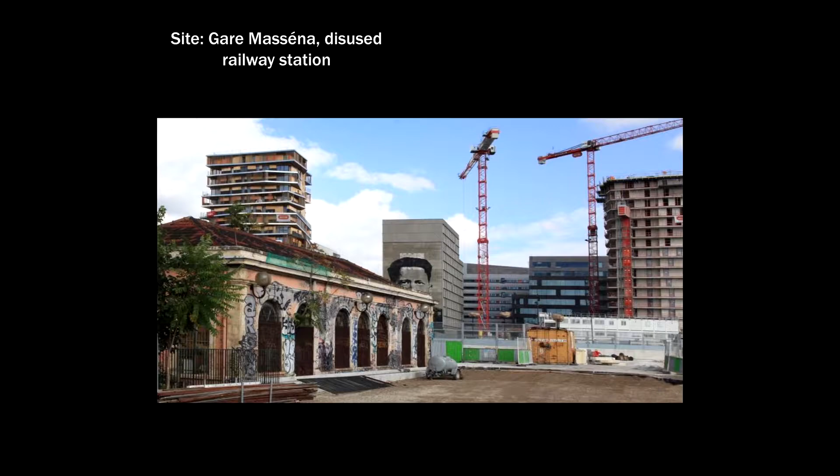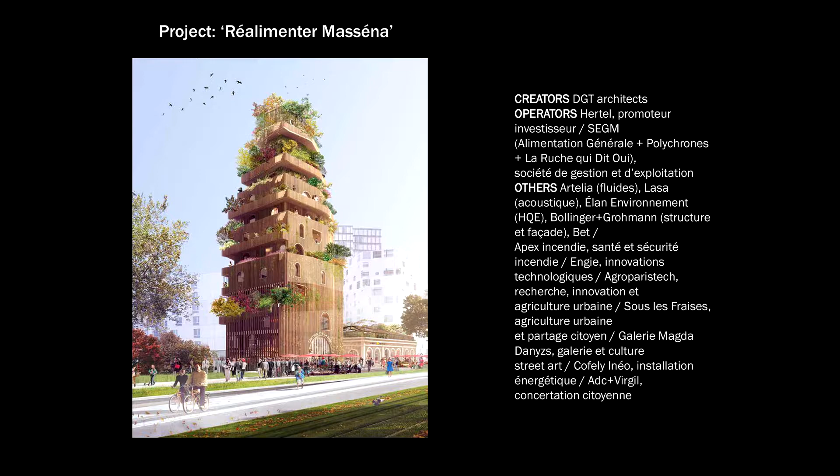And the winning project has been a project called Réalimenter Masséna, re-feeding Masséna. The architect is a young Lebanese architect, Lina Ghotmeh, and the developer is Hertel. The project is all about the entire food circuit, from production to consumption in the same building. The motto in French is de la fourche à la fourchette.

We had in this project laboratories of research, an institute about food, a market, restaurants, urban agriculture, apartments for chefs, spaces for food lessons. The building will be entirely made in wood, either the structure or the facade, and it will bring a lot of animation in a newly urbanized area that lacks shops and life. Another example, maybe the most, this is another view of Réalimenter Masséna.

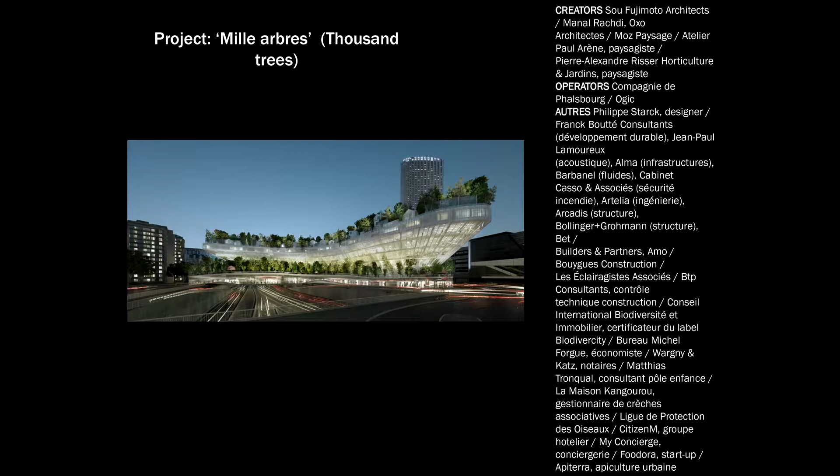The winning project is this one, 1,000 Trees, a concept by a Japanese and a French architect. The Japanese architect is very well known, Sou Fujimoto, and the French one is a young architect. The company is named Oxo, and the developer is Compagnie de Phalsbourg. A very diverse team, as you can see on the right side of the slide, including the designer Philippe Starck.

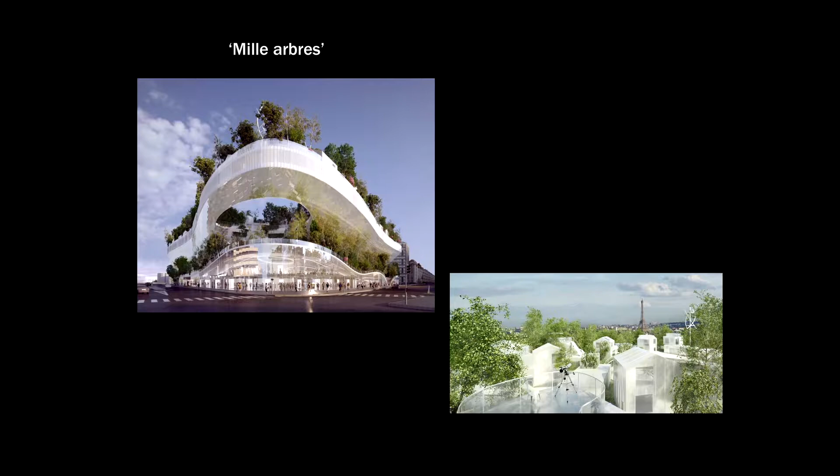What is interesting is that this project has two forests, which is why it's named 1,000 Trees: one public forest at the bottom of the building, and a private one with a village on top. You can see the little village here on the top of the building, along with hotels, shops, and childcare centers. It's a very ambitious project, a technical challenge, paving the way to new types of buildings over the ring road and the possibility of inhabiting there.

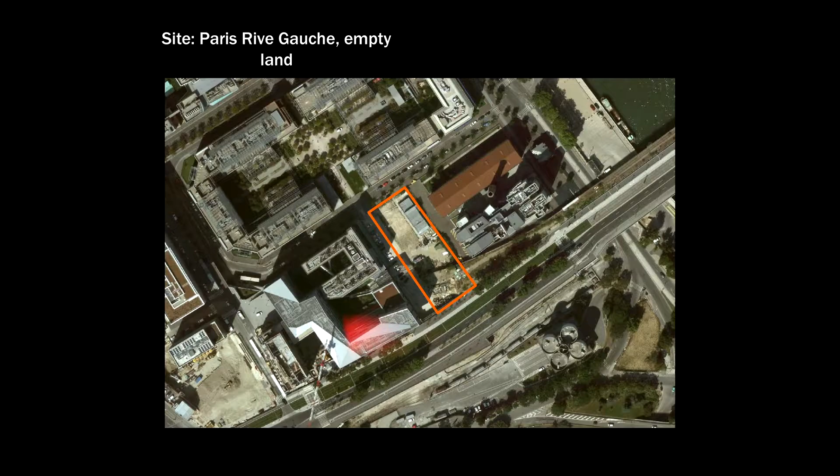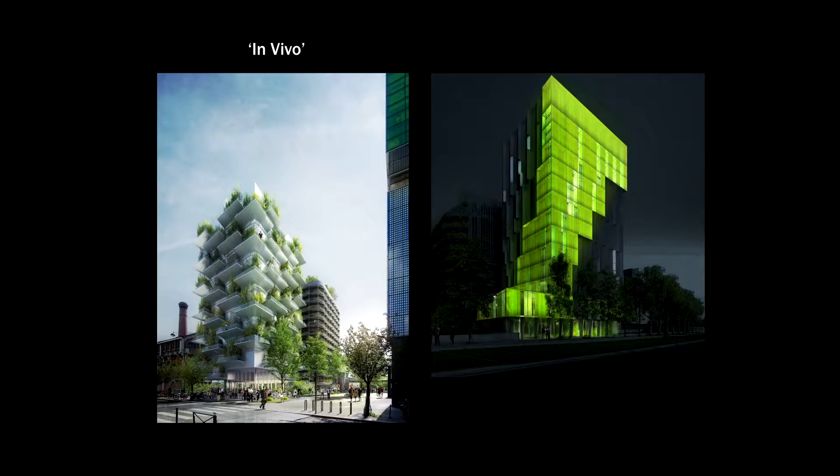The program had to be mainly housing, and the winning project is In Vivo, a technological innovation for living buildings. The architect is X-TU, and the developer is Marignan. There are three buildings: one called Plant House, another Tree House, and the third, more interesting, Algae Building. The facade of the Algae Building is made of microalgae that helps cool the building and can be cultivated for cosmetic and other industrial uses. The architectural firm X-TU has worked for many years on this algae technology and holds a patent on it. As you can see, the algae are luminescent during the night.

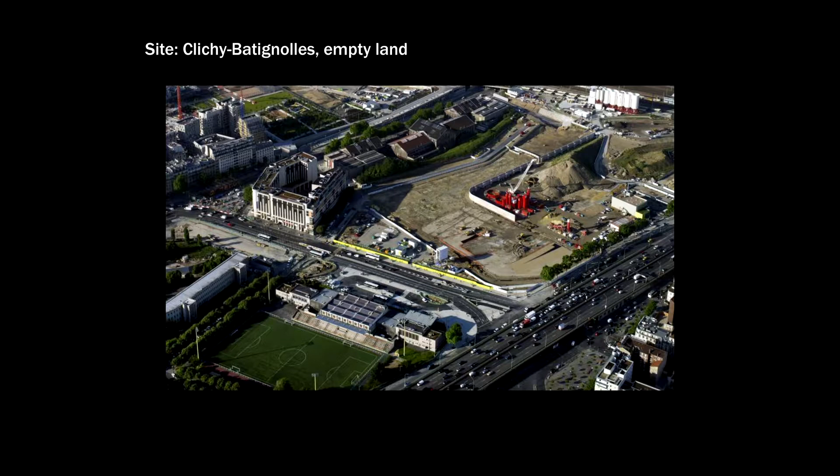My last example is the Stream Building, on empty land in Clichy-Batignolles, a railway wasteland. Here the program could not be housing given its location. The winning project is a mixed program of offices and hotels, Stream Building by Philippe Chiambaretta and Hines. This project is the outcome of long-term theoretical work led by Philippe Chiambaretta through his scientific review, Stream, on ecological buildings and new modes of working.

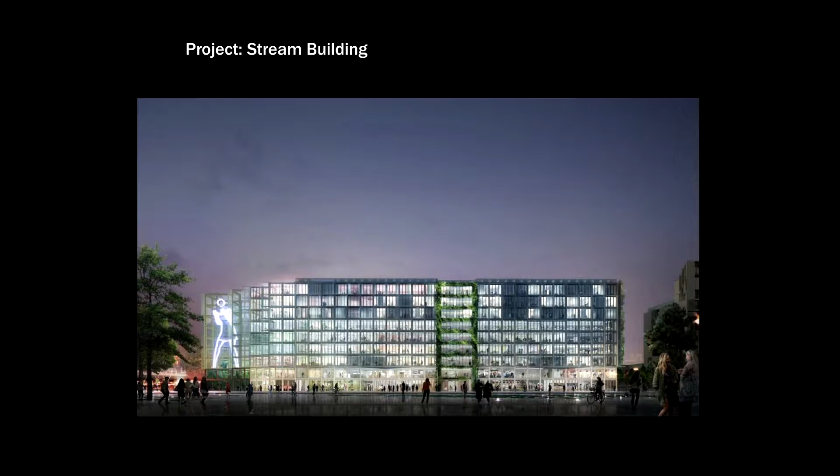This is a very new generation of office buildings, mutable in design, allowing it to transform into a housing building, open 24 hours a day, a hotel for young workers, with all the spaces designed as co-working spaces. This building also has a wooden structure and agricultural activity on the top. So you can see another side of this building.

Some overall figures of this competition: first, the high number of social housing units we were able to create, and a high amount of green areas—one of the major trends of the competition. The newspaper Le Monde titled its piece '22 Shades of Green.' At the same time, these projects distinguish themselves by the commons they create, generating important revenue for the city of Paris. But we met our commitment to base this competition on innovation, not on money.

When things are well organized, private projects can be of very high general interest when the competition is created with this goal in mind.

Other overall trends of this competition: the first one is that the buildings of Reinventing Paris have been thought with the final users. It's what we can call a user-oriented architecture. It's impossible today, I think, to think a building without the final users, and they have to be part of the team, not only people we ask questions in order to see what they want.

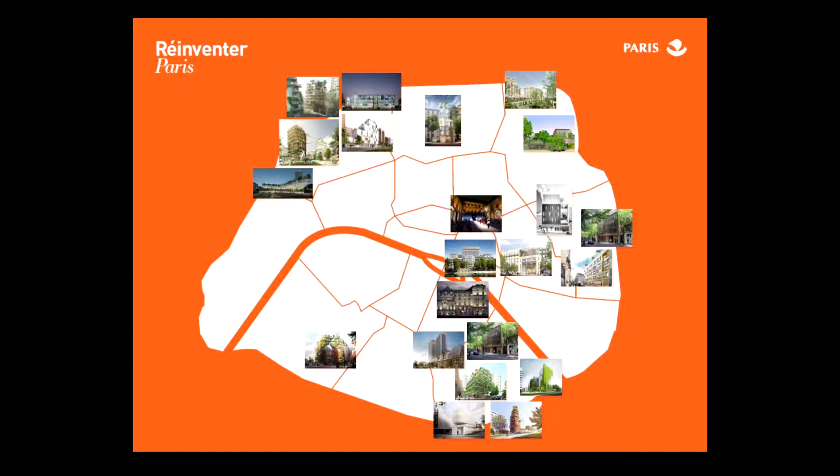We had 22 laureates. The 22 laureates give an overview of the current state of the art in urban innovation. They innovate in environmental issues, in mixing uses, in materials, in processes, and in multidisciplinary teams. 22 manifesto projects, all very coherent in their innovation and very adapted to their context. No off-ground innovation - innovation is not a cosmetic one. You have to have innovation in relationship with the context of the building.

The 22 laureates are already on their way to completion. 2 building permits have been delivered, 5 are under study, and all projects have been validated by the Council of Paris. Most of the projects will be realized before 2020. The most complex ones should be completed in 2022.

We are very aware that it's a bet on the future, that some innovations will fail and some will succeed. But this is the price to pay for making innovation, even in the field of real estate and architecture. And we have created a system of checks. We have also innovated in the field of selling contracts - special clauses are attached to the selling contract to ensure innovation for 10 years and uses of space for 15 years.

This competition has put Paris at the center of attention in terms of urban innovation and attractiveness. It highlights an urban model not focused on high-rise buildings, but rather on open innovation in existing areas - innovation at all scales in Paris. Small projects matter as much as big projects.